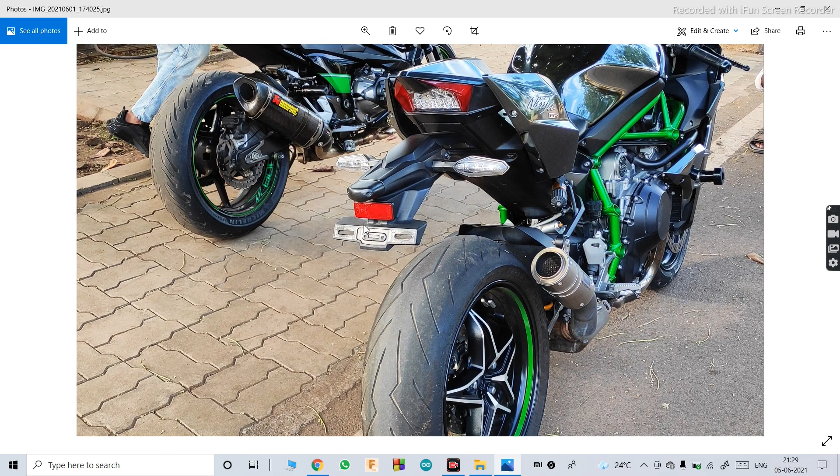That guy just bought this bike like 2 days ago, I guess, and hopefully I got a chance to see it today. Within 2 days, that guy just changed the stock exhaust to a race fit slip-on. He hasn't put the full system till now, but when I spoke to him, he told me that soon enough he's going to do that as well. I'll be waiting for that, anyways.

Insane, just insane. This bike has crossed the level of insanity, guys. We'll get on to his spec very soon. Till then, just get a glimpse of this bike, how it looks.

Those dual 330mm discs look massive in the front. We got a single-sided swing arm in the rear, and the wheel looks so awesome. The front was completely carbon fiber and it was glistening under the sun.

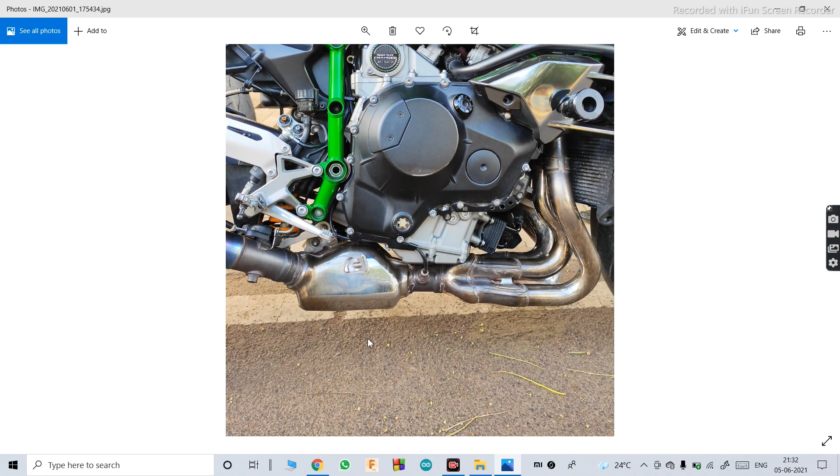Okay, so as you can see, it is written supercharged, and there it is written as 2017, 22 out of 120, limited production bike. As you all know, that green accent looks really cool. Still, there's a catalytic converter which I feel bad about. He even put the sliders, those are essential. Insane, guys, just insane. I shot some of the videos too.

So there nearby even a ZX10R 2021. That idling sounds so good.

So as I told you, this ZX10R is of 2021, and even this guy has changed the exhaust system. He has upgraded it to Akrapovic. It isn't a full system, but you can call it that, because he has changed the bent pipe and the slip-on, and you don't need to change the headers of the ZX10R.

As you know, the stock headers themselves are titanium, and it was the best trio I had ever seen, guys, the best trio of Kawasaki. So we had the Z800, which is the best budget naked, then the ZX10R, which is the liter class best budget bike, and the world's fastest and most powerful bike, the Kawasaki H2 2017.

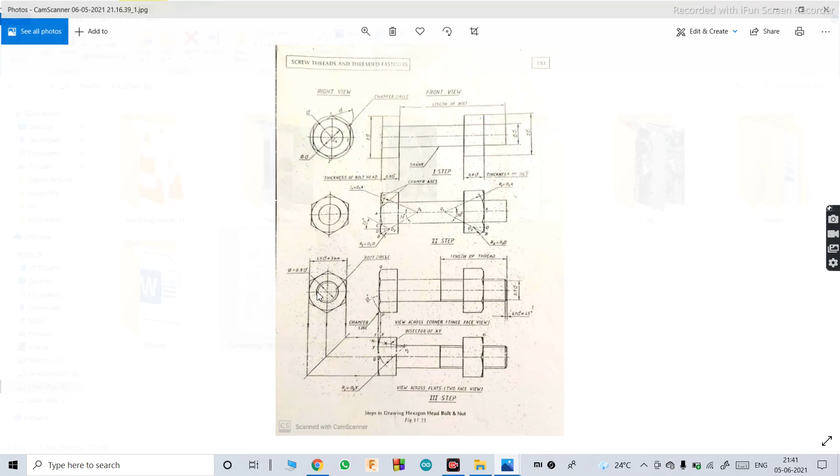We'll move on to the topic we have started this video for. So far what we have done is made a single design which used to be a single part. So in this video what I'm going to do is try to make two parts and assemble them. So we are making a hexagonal bolt and nut.

Okay, so let me show you. Hexagonal nut and bolt. Okay, so this is what it's gonna look like, somewhat like this.

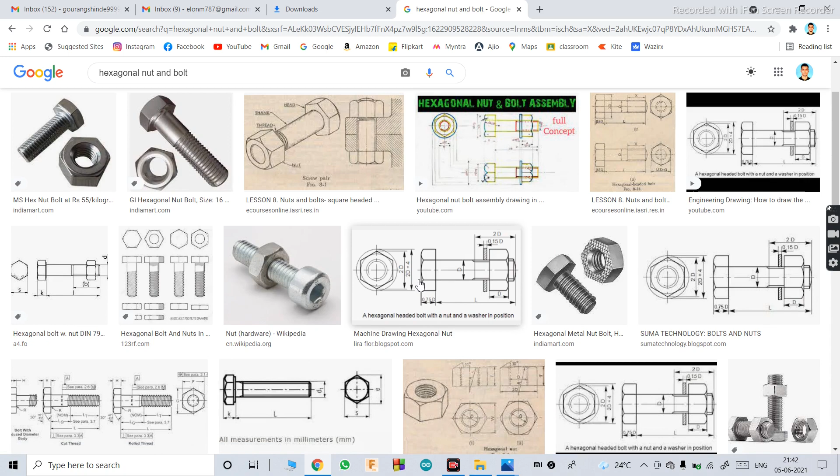So why is it called a hexagonal bolt? Because it has this head that is shaped like a hexagon. You even get square ones. Let me show you. You even get a square nut and bolt.

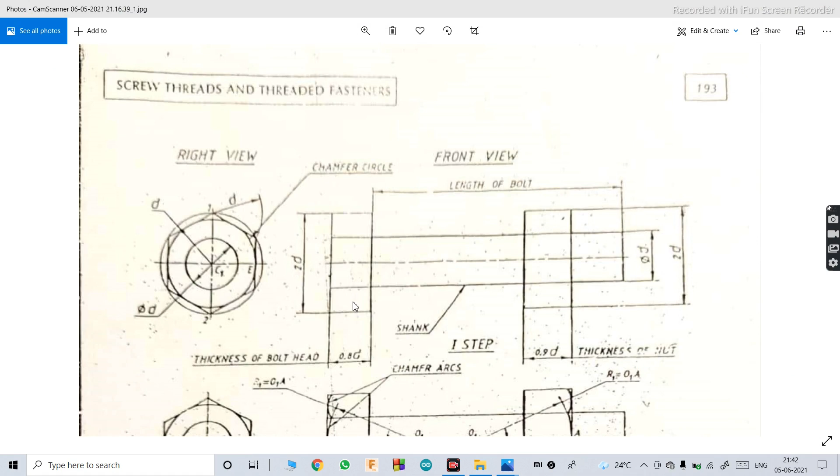So we'll start with the hexagon because that is the one mostly used in the industry, as you might have seen around you. So for that, this is the reference that I'm going to use to 2D sketch. You can download this from the description below. Okay, we'll start with this today.

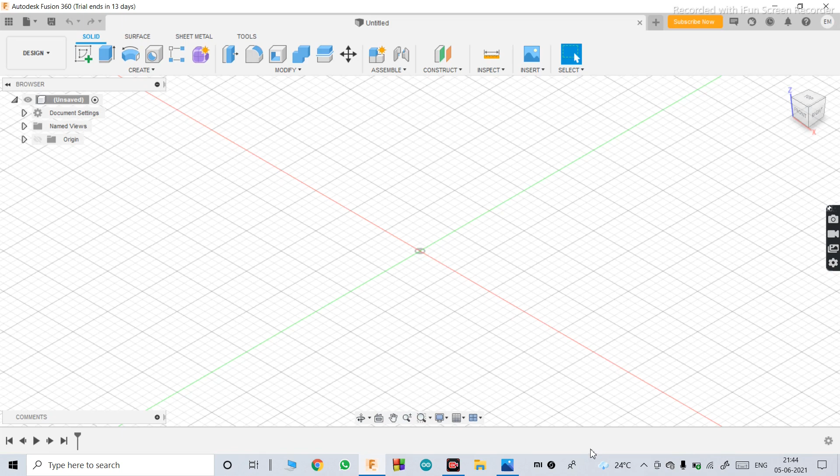Okay, so here the software opens. Let's go back to the sketch.

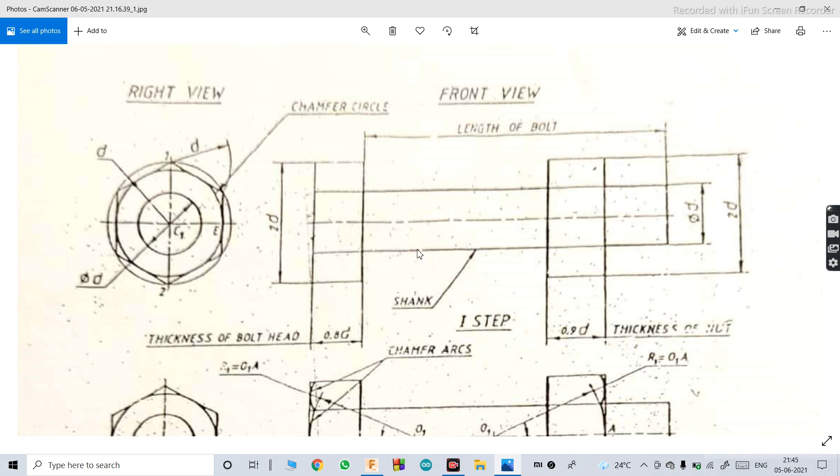Okay, so if you don't know, while making a bolt and nut, there are some industrial specifications you can't exceed. You have to use those standard values. So if you are making a bolt, the bolt head has to always be twice the diameter of the bolt threading part, right? Those are some industrial standards that you have to keep in mind. That's why they haven't mentioned the dimensions here. You can just see that the threaded part is mentioned as d, that is diameter, and if you check the head, it is mentioned as 2d, that is 2 times the diameter used for the threaded part. That is how it is.

So if you want to know the thickness of that head, that is 0.8d, and the thickness of the nut is 0.9d, like that. You have to maintain some standards. Okay, so we'll get started with this. So we know that it is hexagonal, so the first step is we have to make that hexagon shape. That has to be 20.

For this sketch I'm going to use d as 10 mm. You can use as per your requirements, but just to make it easier to understand, I'll be using diameter as 10. So if d is 10, the head diameter, or the distance from this to this, is going to be 2d, that is 2 times 10 is 20. So with that, let's get started.

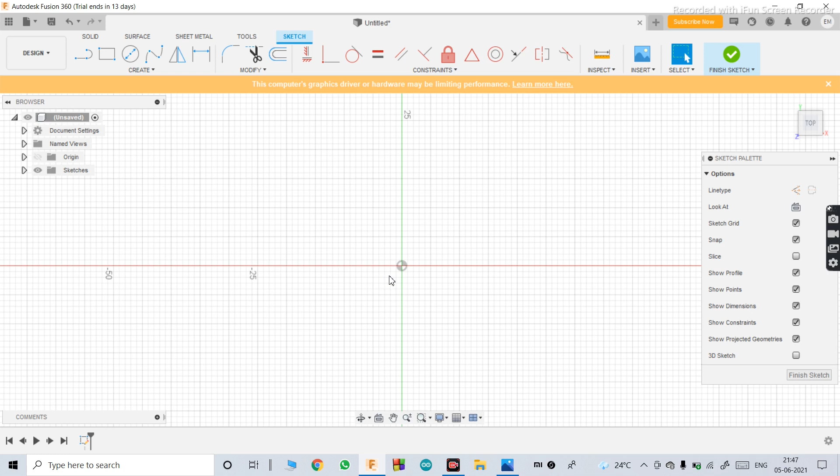Go to sketch, select the top plane, that is where we're gonna start the sketch. There are multiple ways to draw a hexagon, as I've told you previously, so let me show you a basic way. Just make a circle of 20 mm diameter, then use the line command.

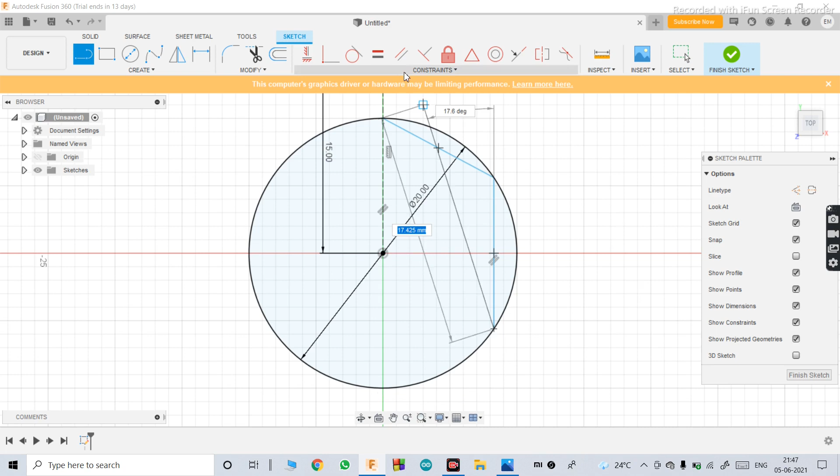Then make it construction, make it 15. Now you'll get the point from where to start. Turn off the construction, and just randomly go on selecting points like this.

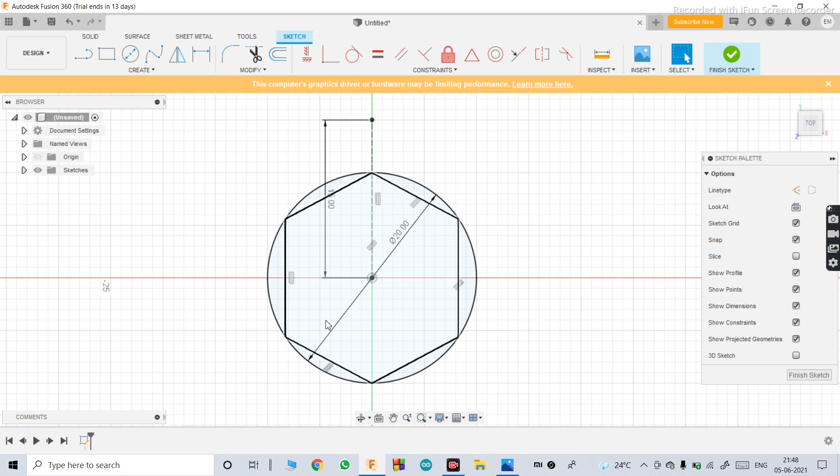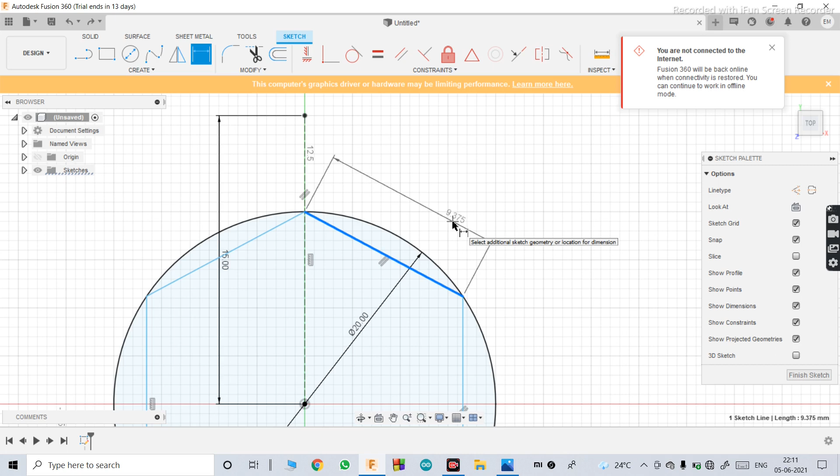Once you do this, go to sketch dimension and select this line. Don't click when it is vertical like this; make sure the blue line is parallel to the line showing up right now. Then click there and make it 10. Hit enter. This implies that these both lines are parallel to each other and the dimensions are also the same for both of those. Let me show you like this.

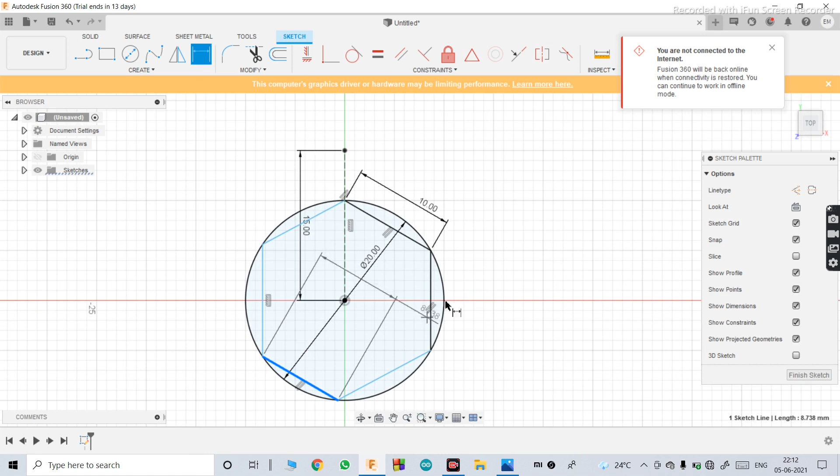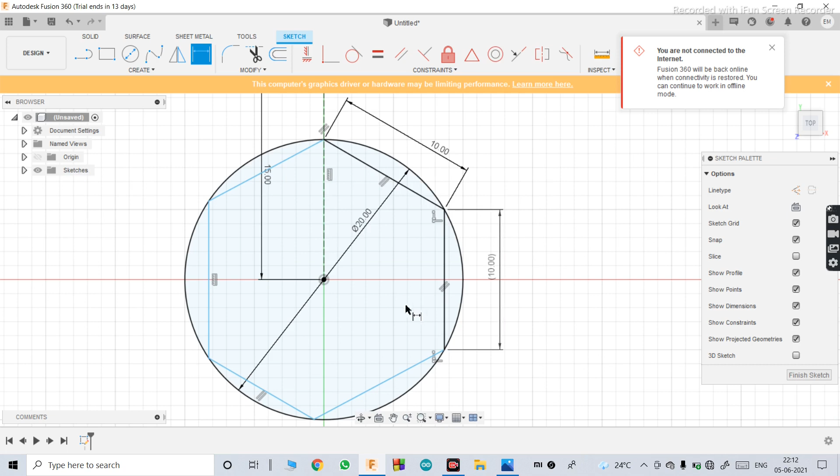So first we'll do the same for the rest of those. This is also 10. As you can see, adding this dimension adds a constraint. Just hit OK. Now make this also 10. As you can see now, we have specified dimensions to these three lines, and it automatically got symmetric on this side also.

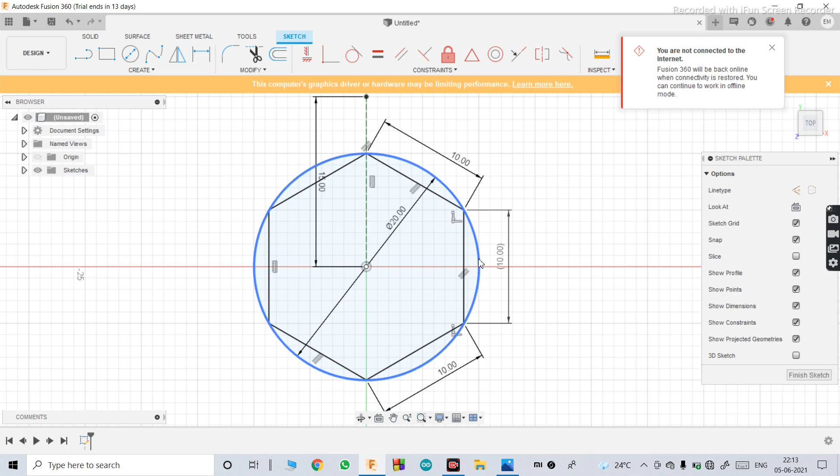Just to verify, you can check that out. Now this is 10, this is also 10, this is also 10, as you can see. So this is a very basic way to make a hexagon, and later on you can just delete this outer circle and we have a perfect hexagon.

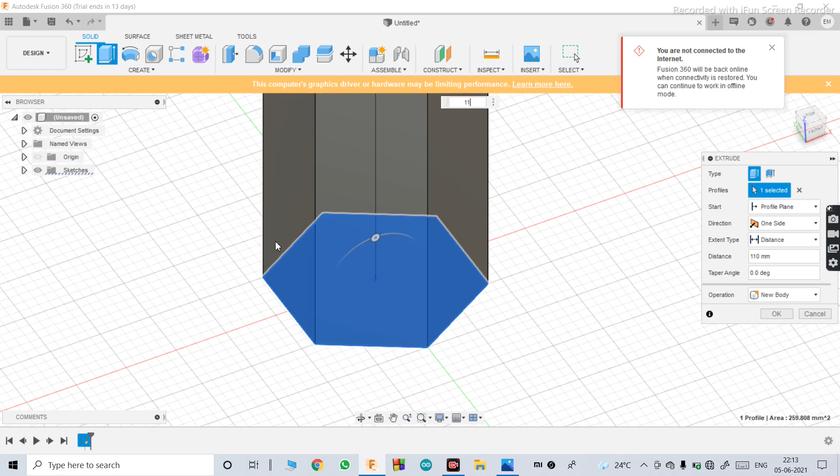You can delete this also and extrude this, like that if you want. I'll tell you another way how to do that. We'll just delete this entire thing.

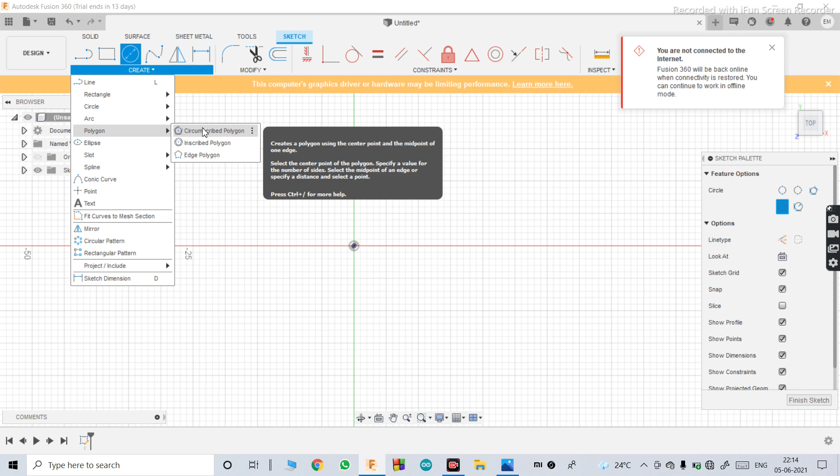Then we'll go here in the create section and use the command called polygon. We'll use circumscribed polygon, meaning it will start from the circle. So don't click anywhere, just click at the center, pull it out, keep it like that only. As you can see, it is asking for two dimensions: one is the radius of the circle, and the other is the number of faces you want.

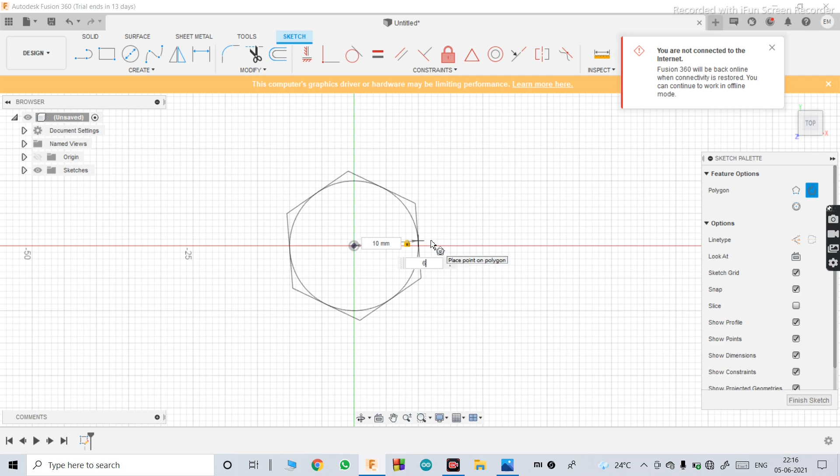The radius of the circle is going to be 10 since the diameter is 20. Once you hit 10, use the tab button, then make the faces 6, and it becomes a hexagon, or make it 5 and it becomes a pentagon, just like that. Make it 6, hit enter, and finish the sketch, and that's how you get a hexagon in the easiest way possible.

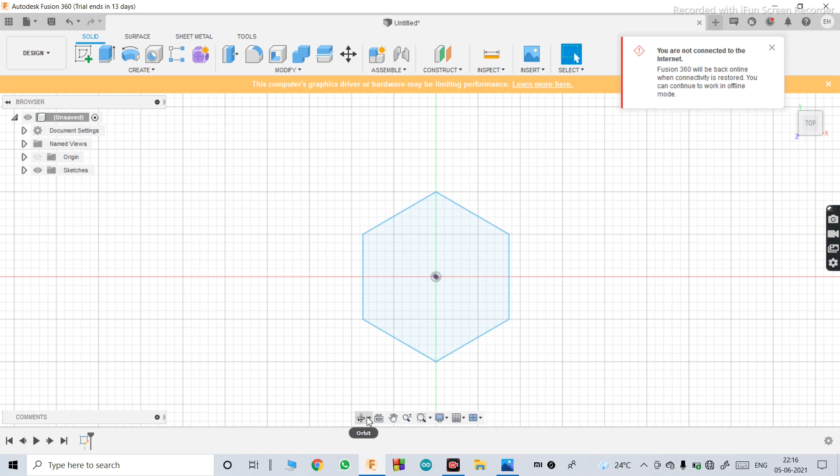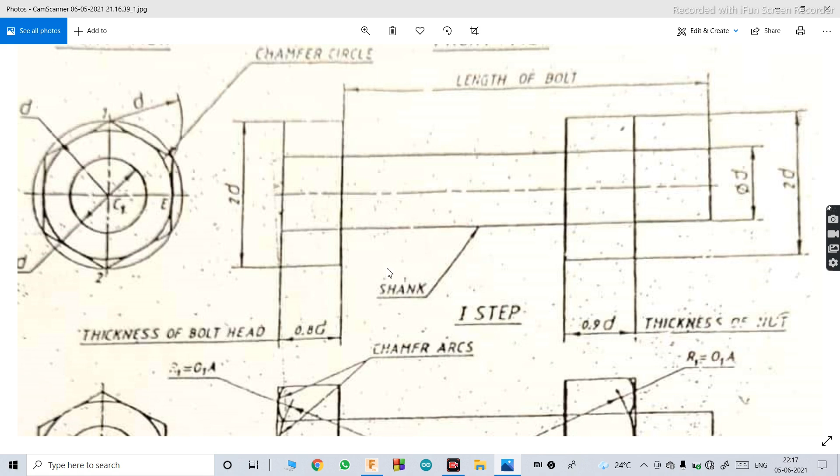Once you are ready with your 2D hexagon, what we have to do is specify the thickness of that head. For that we'll go back to the sketch. As you can see here, it is 0.8D, that is the diameter of the thread as I told you. We've assumed it to be 10 mm, so we'll make it 0.8 multiplied by 10. Select that face, use the tool called extrude, make it 0.8 multiplied by 10. There you are, hit enter.

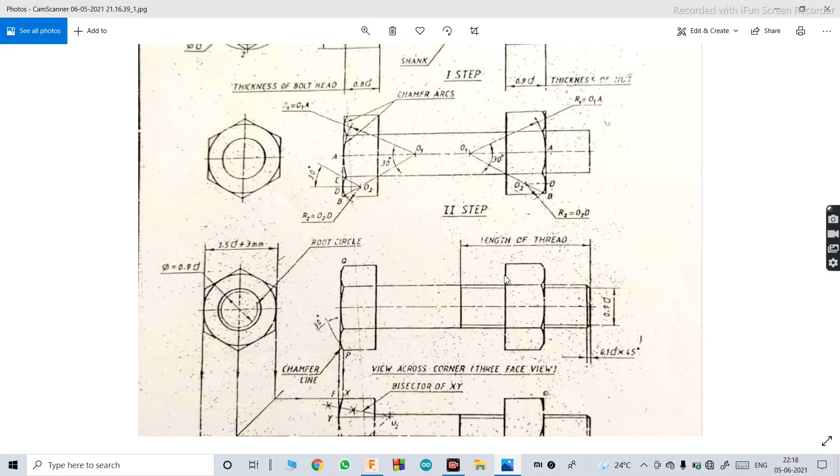So that is our bolt's head right over there. We'll select the upper face because that is where we are going to make the threading part. Then go to sketch again. We know that the threaded shaft is going to be 10 mm in diameter because that is what our D is, right? We assume that D has to be 10 mm. So here I have made a circle of 10 mm.

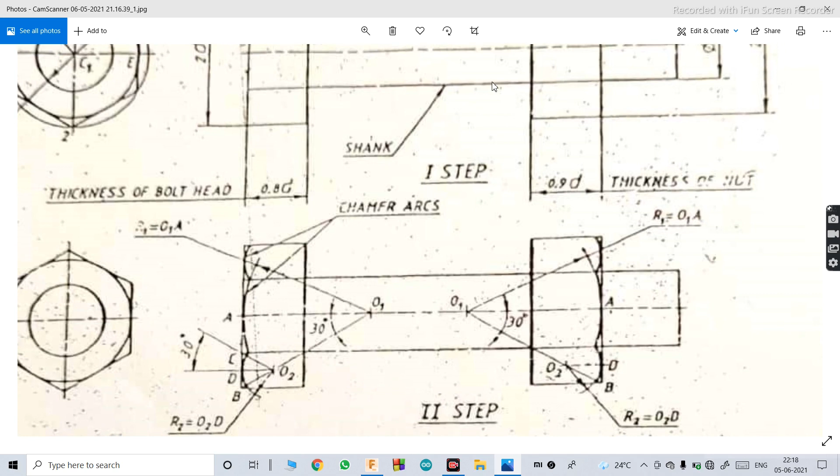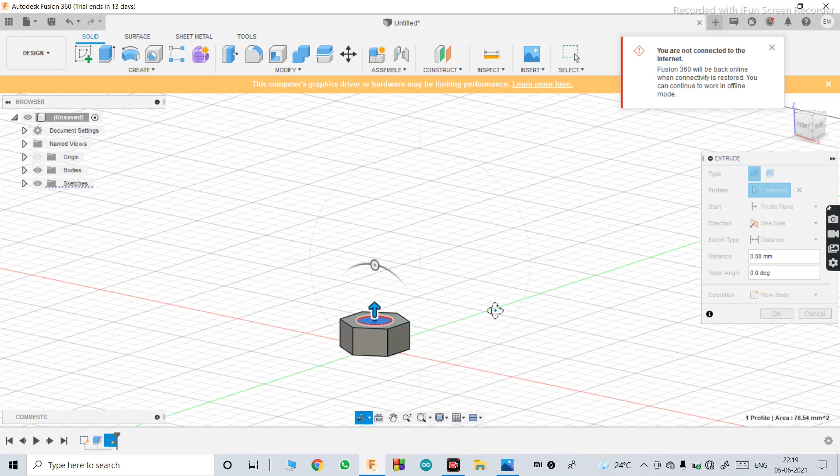We'll just tilt it a little bit. Select this plane, the circle we have made just now — oh wait, before that you have to finish the sketch. Now use the tool called extrude. As you can see, in the sketch they haven't mentioned the length of the bolt, so it depends upon the application where you're gonna use it. You can adjust the length according to you. For this project I'm gonna make it 50. Perfect.

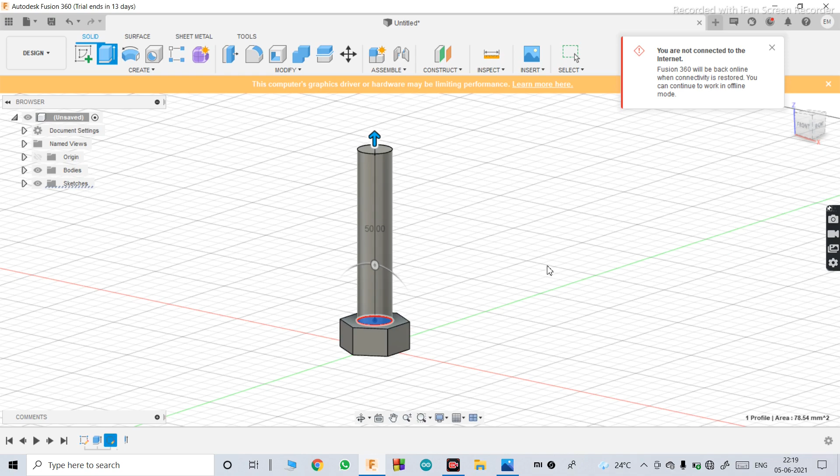Let all these aspects be as it is. Just make sure that the operation has to be joined and hit OK. And our bolt is almost ready.

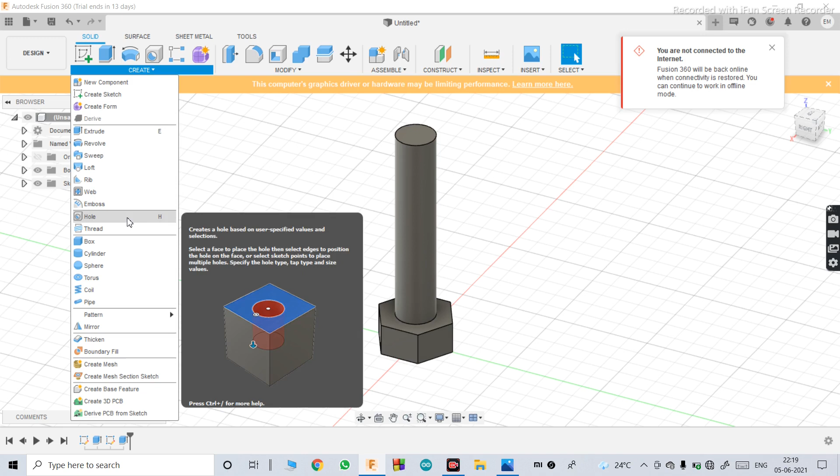What we are missing is the bolt can't be plain like this, right? So we have to make that threaded. Hopefully we got a command called thread over here. We'll select that, and it will ask you to select the faces, so select this face because that is where we want it to be threaded.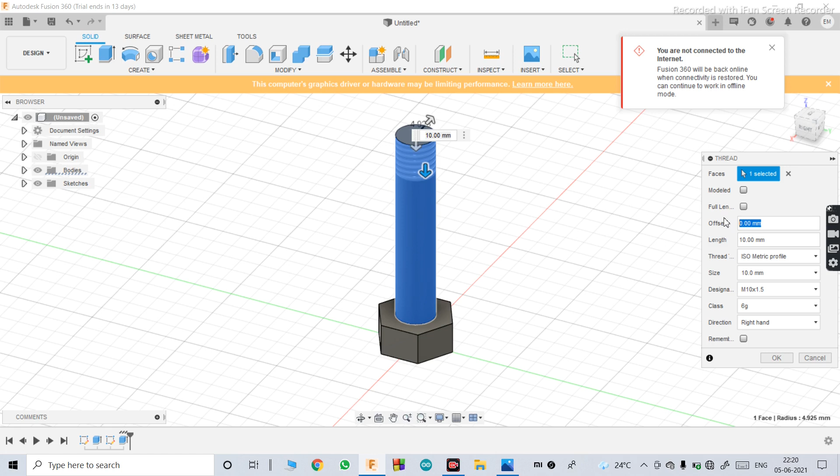Then it will give you a bunch of options, whether you want it to be full length or how much exactly you want it to be. We don't want it full length, so we'll make the offset to 30. Oh, it has become an offset. Let the offset be 0.

Length be 30, perfect. There are multiple thread types such as Acme thread, ISO metric, BSP, ANSI - there are a bunch of them. We'll just keep it as it is. You can even change the size - this will change the diameter of the thread. Make it 5, it becomes too small. Then this is perfect. You can also change the design, class, direction, whether you want it right or left-handed. We'll keep it right and hit OK.

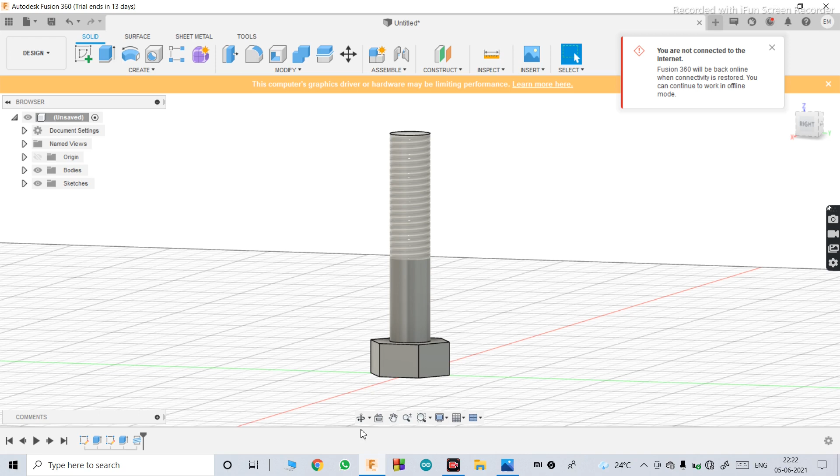So that's how it looks. The distance from this bolt's bottom to the entire length is 50, and we have made only the 30mm part threaded. That's what we wanted. So this is what our bolt looks like.

Now we'll go and make a nut. For that, again go back to the sketch, select the top plane, and repeat the same procedure.

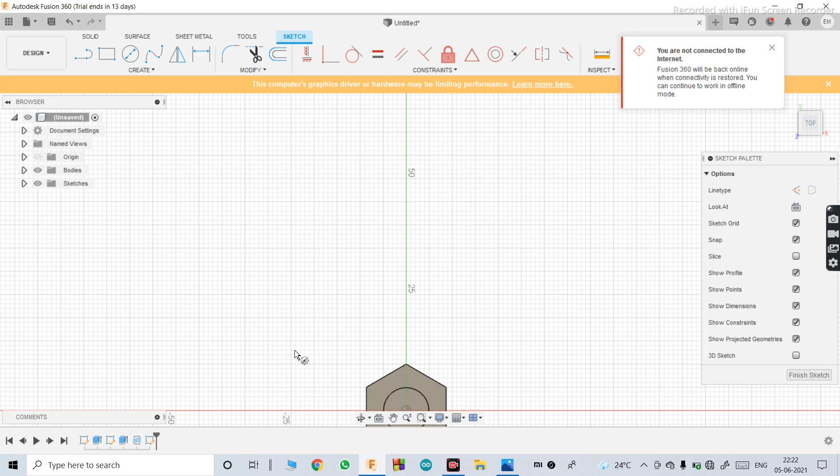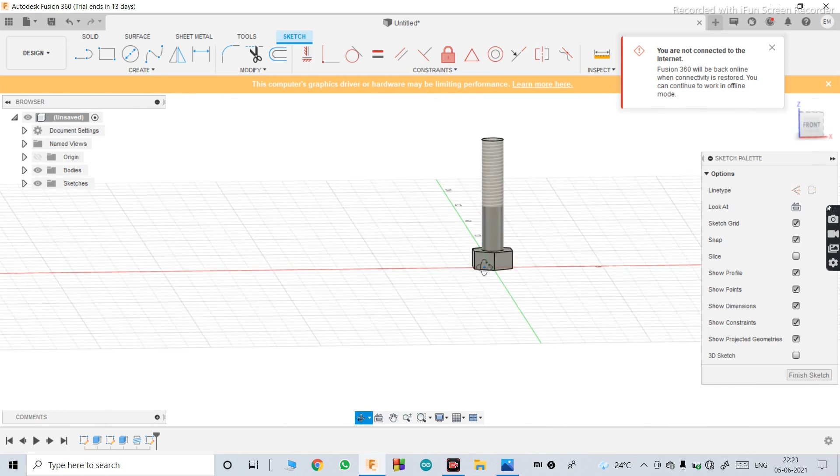Wait. This is a very dumb idea, right? This isn't what you came here for. As you know, the lazy person finds some smart way out.

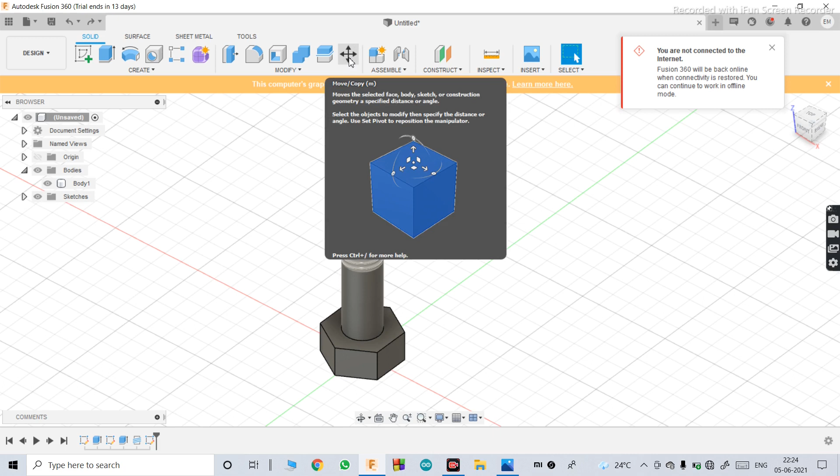So what I'm gonna do is just go here - there's a command called move or copy. Select that. Now select the bolt, and what you have to do is create a copy.

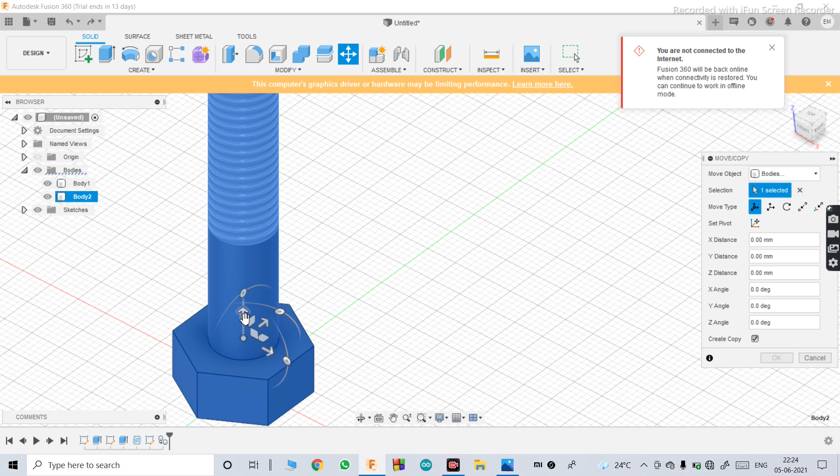Make sure that tick mark is there. Then select any one of these arrows, and drag it outside like that. It will ask for some distance - you can put it randomly, anything like 50. Hit enter. We got a replica of that bolt.

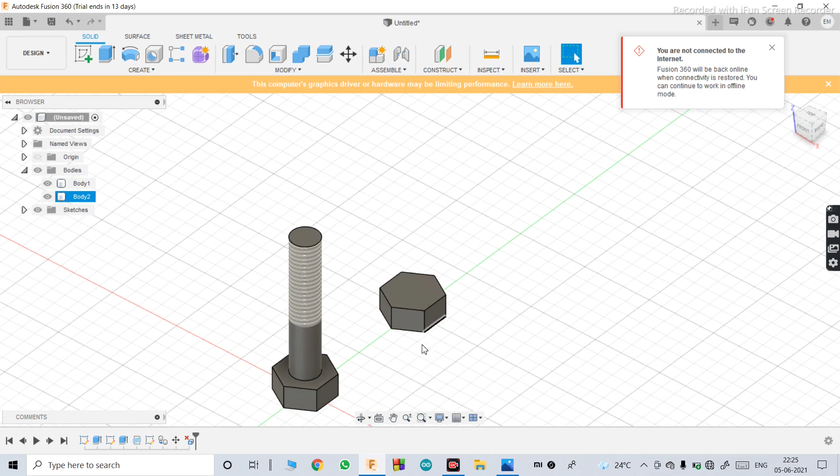So what I'm gonna do is delete this part like that. Then select this plane, use sketch, and select circle again.

If you don't know how to find its center, just go here to sketch dimension, select from this small circle to this small circle. It will give you some distance - as you can see here, 20. So select line, and make sure construction is on.

Create a line. As we know, the total distance is 20, so we'll make it half - make it 10. Enter. Now we'll just delete this dimension.

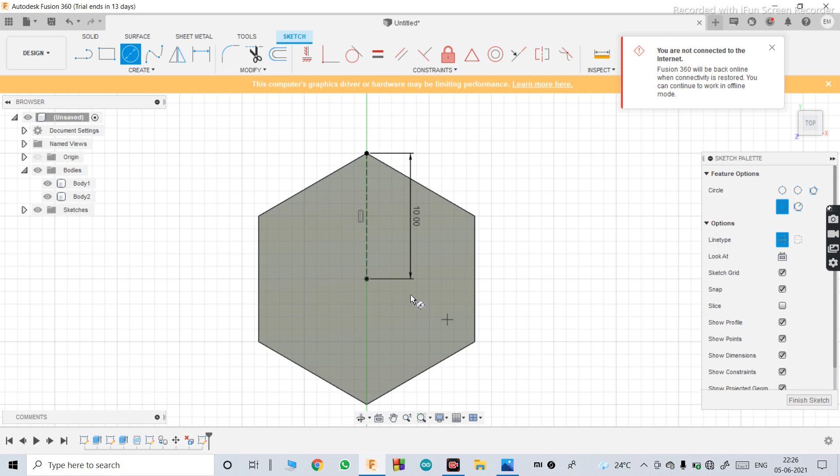We'll use circle, making sure the construction is off. Make a circle of 10mm diameter, and delete this constructed line. Hit finish sketch.

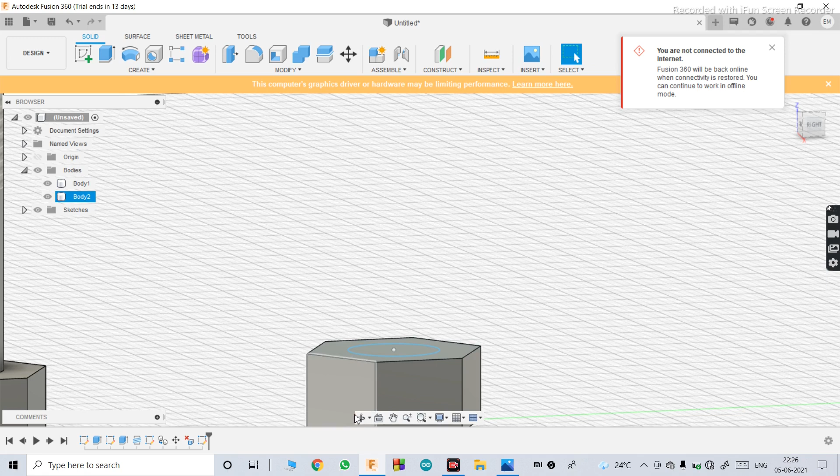Now select the part that we made just now, and use the tool called extrude. Make it -15. It became -15... it became plus. Make it -15, let the operation be cut, and hit OK.

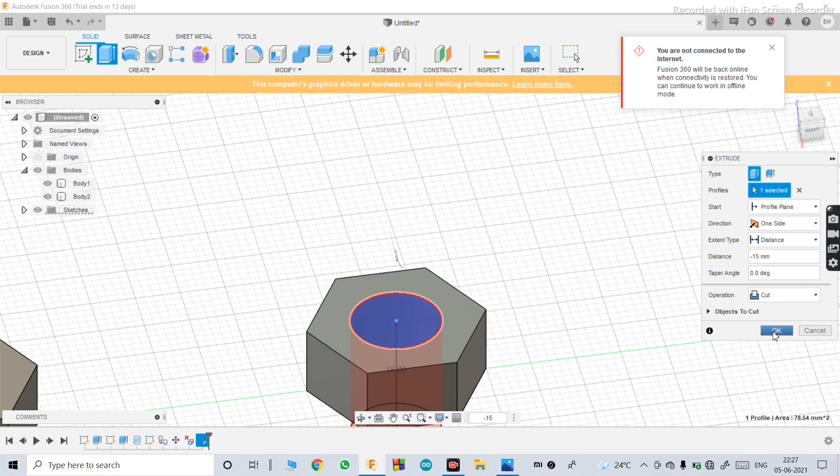And there is a nut, and a nut isn't complete without threading, so we'll give threading to the nut also. These are internal threadings - the length has to be full length, of course, and let all other things be the same. Just hit OK.

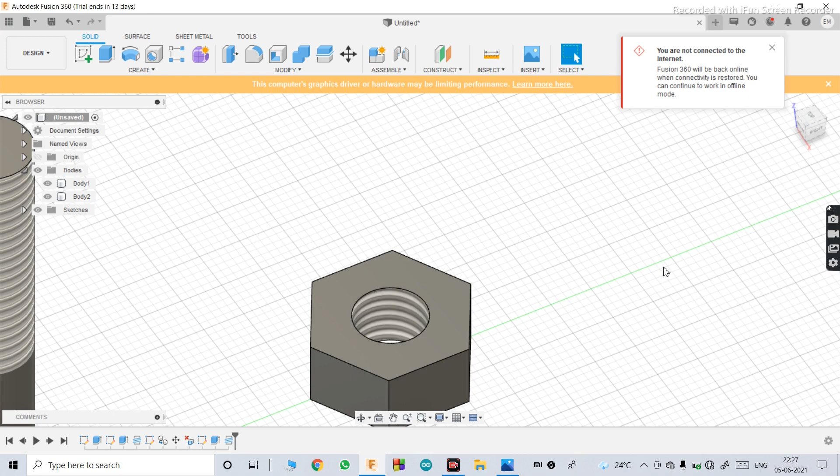Now it is almost ready, right? No, it isn't. Let me find out some mistakes that we did.

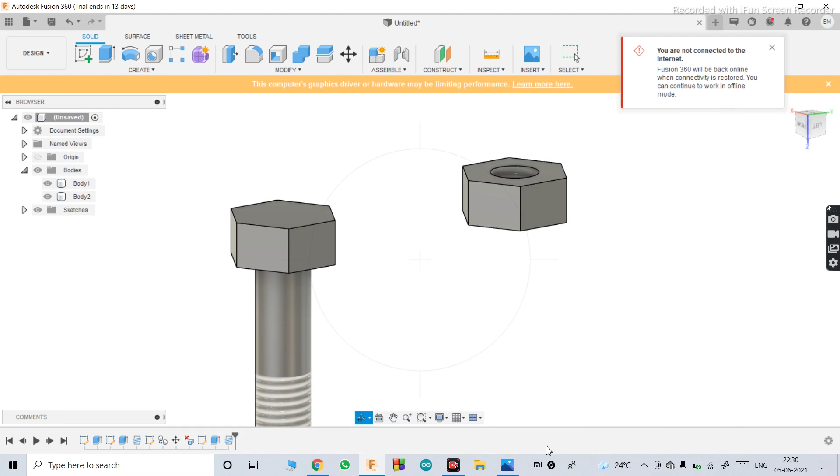Okay, I think I have exhausted my data anyways. Let me go into the sketch. So here it is.

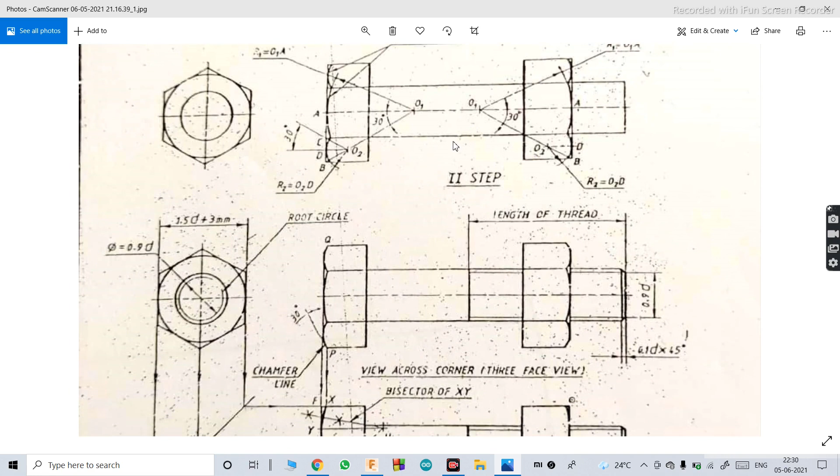I don't know how many of you have observed this, but if you haven't, just go check it out somewhere - there might be some bolts or nuts around you falling somewhere. As you can see, it has some chamfered edges on the top of the head.

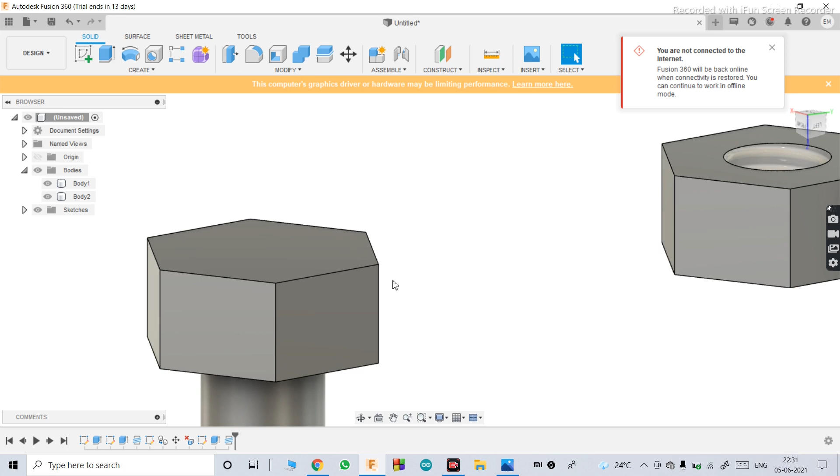These edges are never sharp if you go and observe carefully, to make sure it won't hurt your fingers, or it makes it even simpler when you are using a ring spanner. It slides easily when it has chamfered edges, or else it becomes difficult. So being an engineer, you have to think like one.

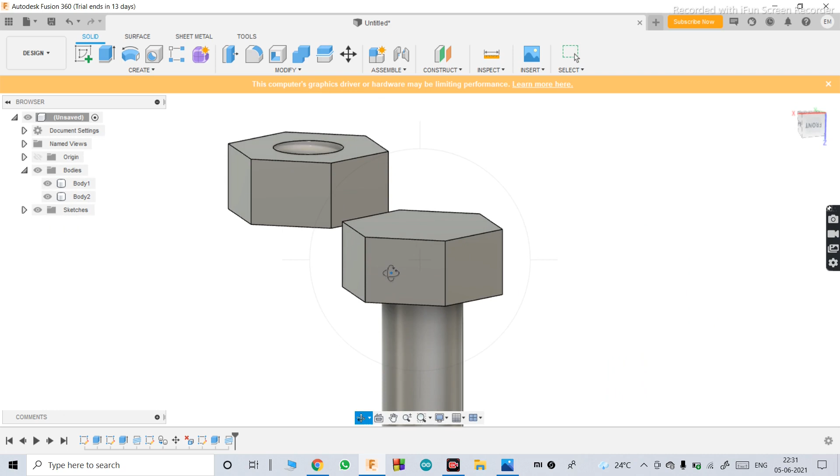You have to think what problems you can face when this is used practically. So for that, we'll chamfer out its edges. Let me just turn on the grid.

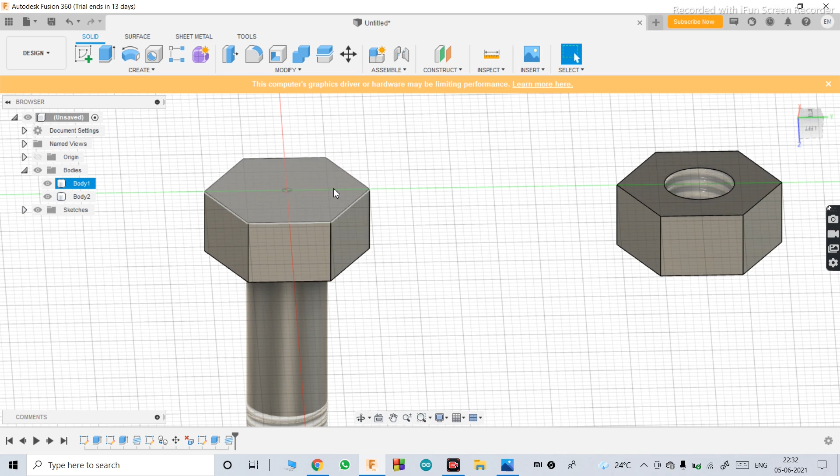Now while selecting, you have to be careful. You have to make sure that when you select the plane, these three faces should be visible. If you see like this, only two faces are visible. Like this, three, it has to be visible. So what we'll do is select this left plane, or you can even select the right plane.

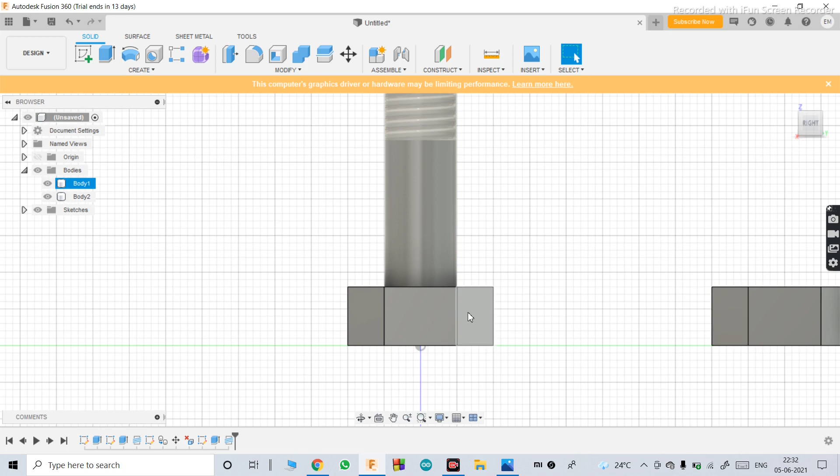Once you select that, you don't have to chamfer the edges towards the threadings. We have to chamfer out the opposite side of the threaded part. So this is what I'm talking about. So for that, what we have to do is...

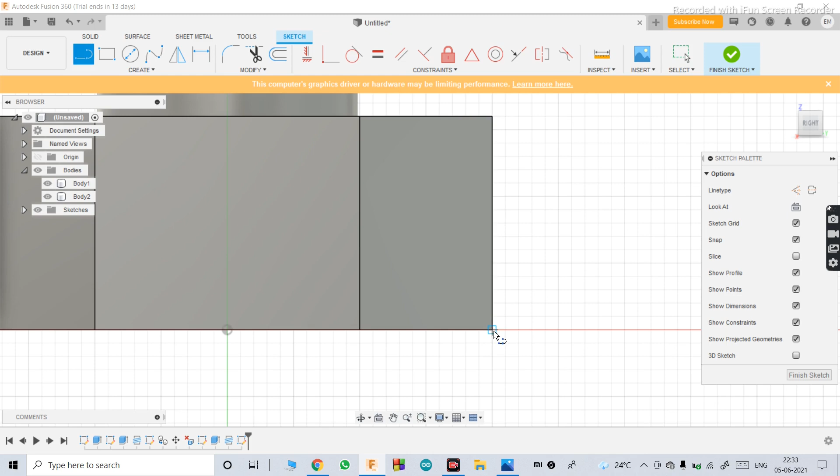We just have to select this right, select the sketch, turn off the bodies, select this plane, again turn on the bodies. Now use line, make it construction, select this center point and make that as 10, enter, turn off the construction, again use line.

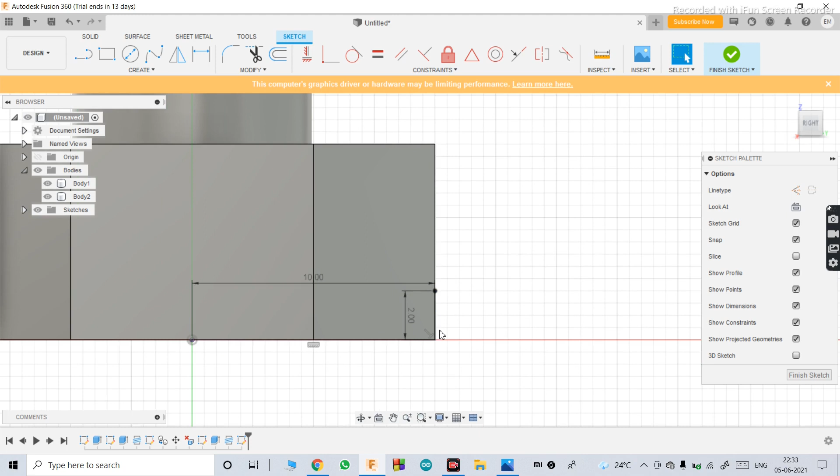Make it around 2 mm tall. That would be too big, make it 1.5, perfect I guess. Do the same, let the width be 1.5, then just connect both those lines and then finish the sketch.

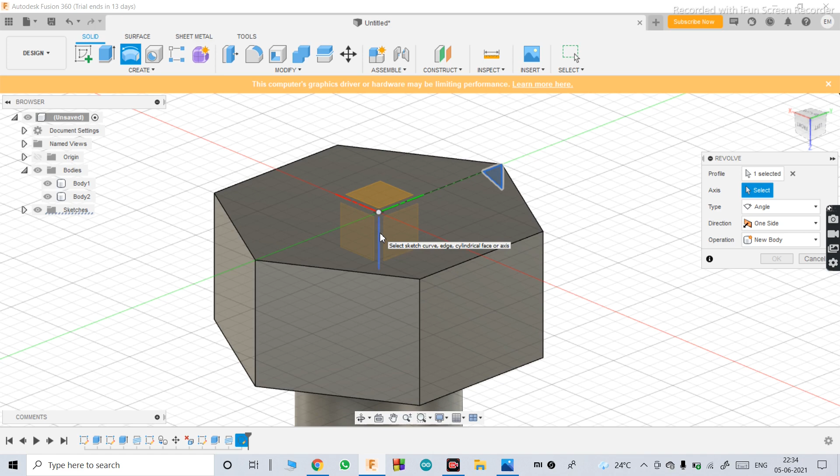Now hide the bodies, select the plane we made just now, again unhide the bodies, and use the tool called revolve, and select this blue line or the central axis of the bolt. So this is what it looks like.

As soon as you select that blue line, make sure your operation has to be cut. Don't mess with any other thing, just hit OK. Yeah, right there, that's what I'm talking about. Now it's nice and doesn't have sharp edges, so it won't hurt anyone's fingers.

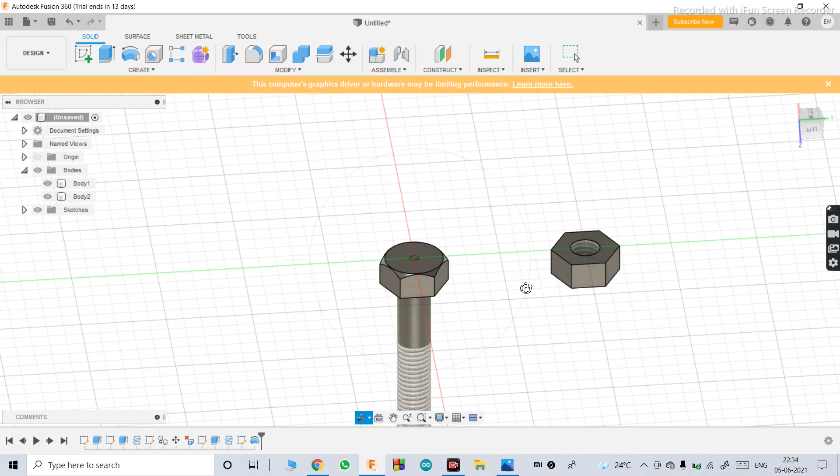We'll do the same for this nut also. Again, we'll select the left plane, we'll do the sketch, hide the bodies like this, unhide the bodies.

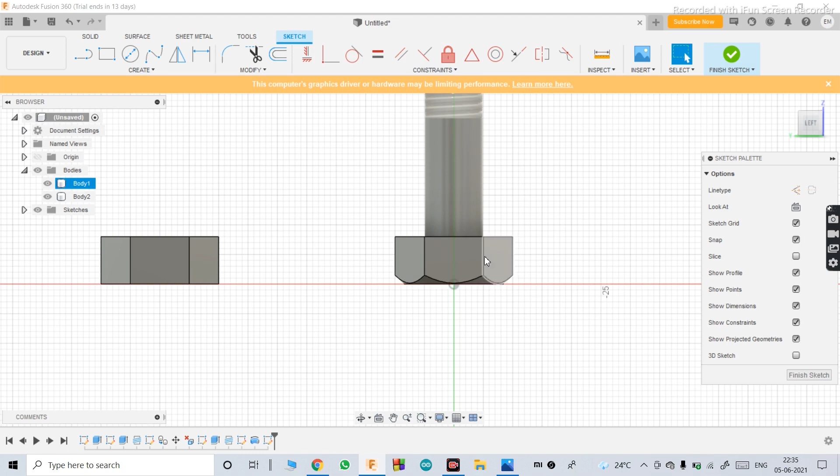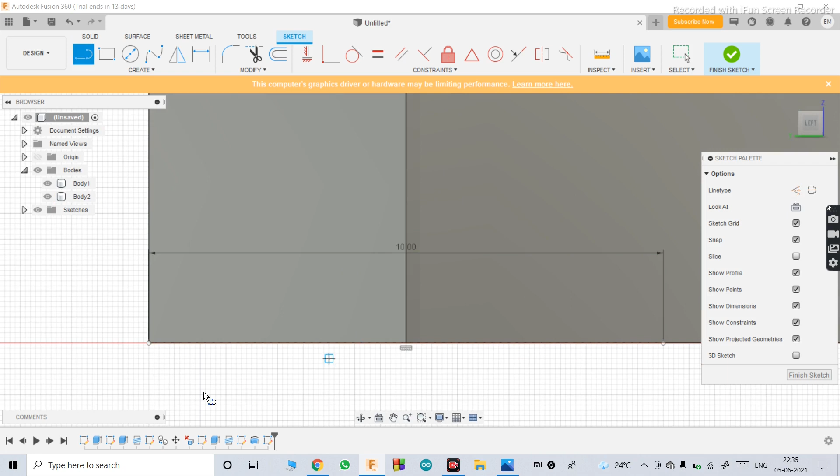Select line, make it construction, make it 10, again use line, this time turn off the construction, get 1.5, hit enter, repeat the same horizontally, then just connect both the lines, make sure it becomes a perfect triangle, finish the sketch, hide the bodies.

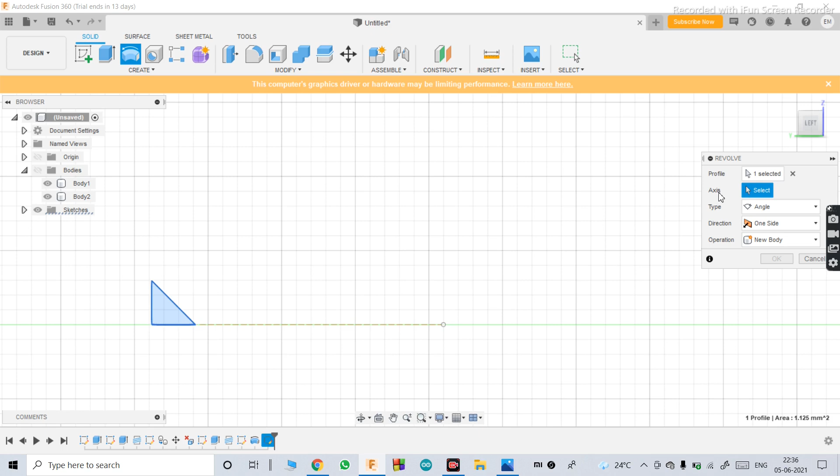Select this part, revolve it around. Okay, so it will ask for the axis, but we don't have that for now because we have used that over here, so you don't have to worry about that. What you just have to do is cancel this.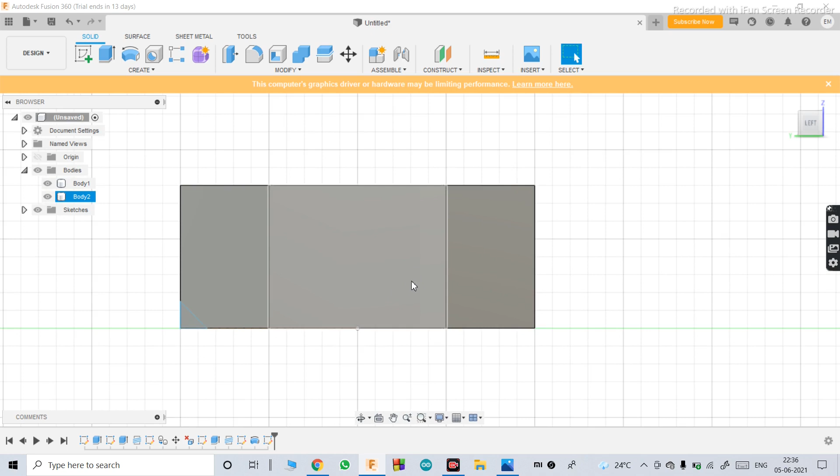Then unhide the bodies again. This time select line - come on. Before that you have to go into sketch, select this plane. Now you'll get the line command, make it construction, make these as 8 mm.

Again select, or let the construction be on. This time what you have to do is hide the bodies and make the vertical construction line as 4 mm.

Again select the construction line, make that as 10, hit enter. Now select this triangle that we made just now.

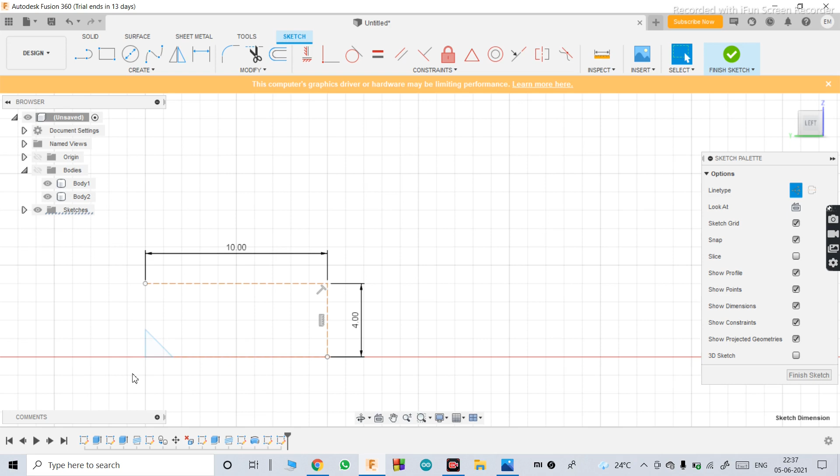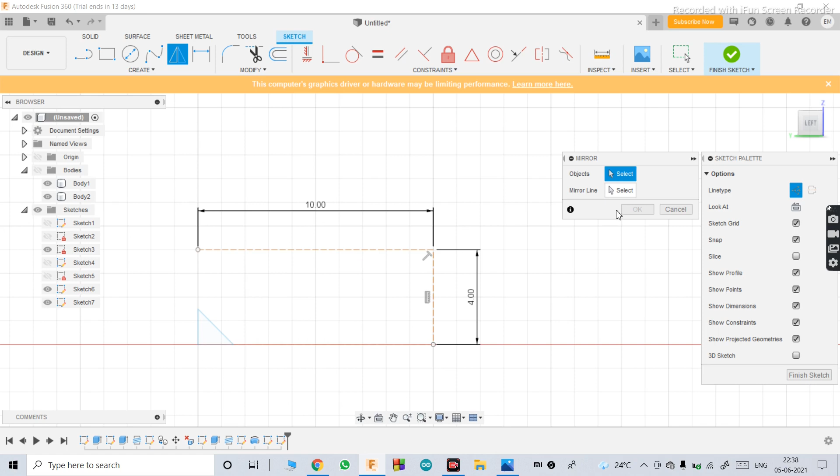Select that triangle, use the command called mirror, select the mirror line as this horizontal construction line, and for objects select sketch 6. If you are not able to select, don't worry, just cancel it, finish the sketch, turn on the bodies.

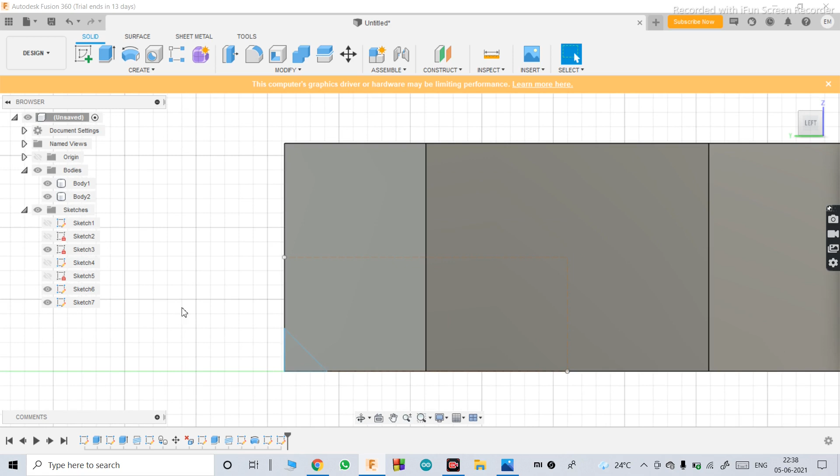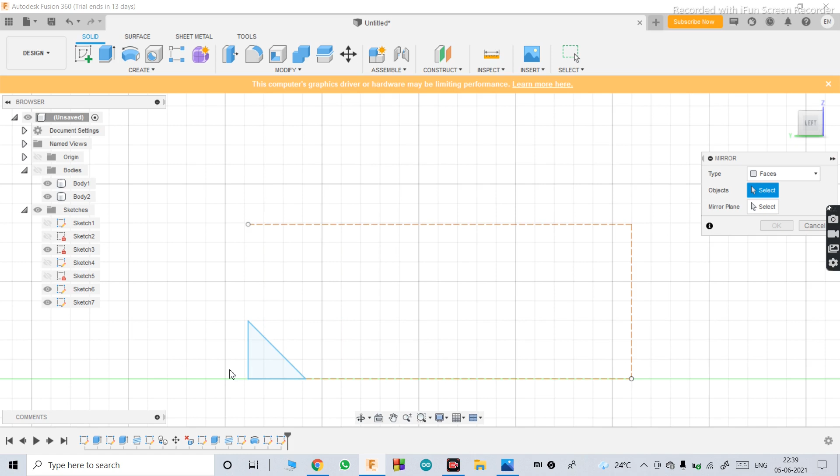Now select that triangle we made just now. Go into mirror. Still, if you are not able to do it, don't worry. So first what we'll do is first revolve it around.

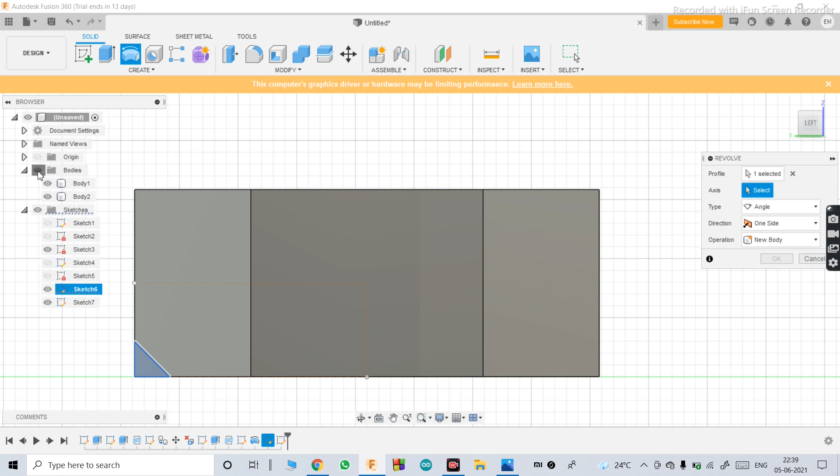So the profile has been selected here, just select the axis. For that, hide body, select this vertical construction line, turn on the bodies again, and you'll see that cut taking place right there.

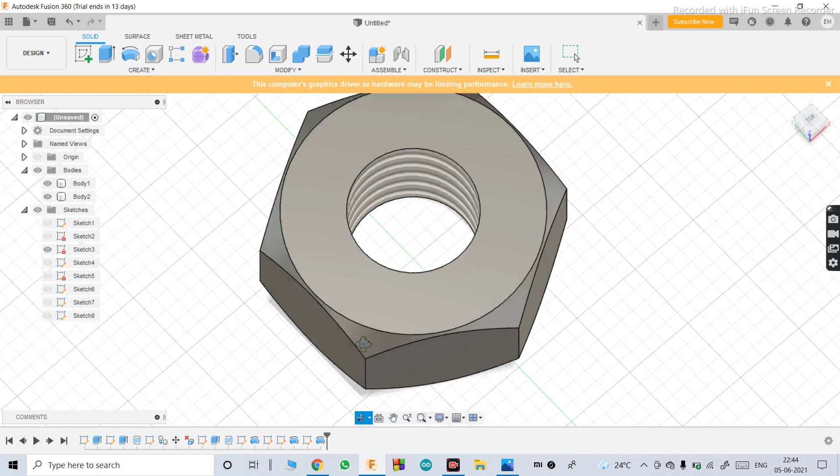Whoa, never seen a perfect nut like this, right? So there's a bolt and a nut. Perfect.

Now nothing is left here, it is perfectly ready. If you are thinking like why I haven't chamfered these edges out, you can go and check - practically it is like that only. The other end of the head is not chamfered, it is left like that only.

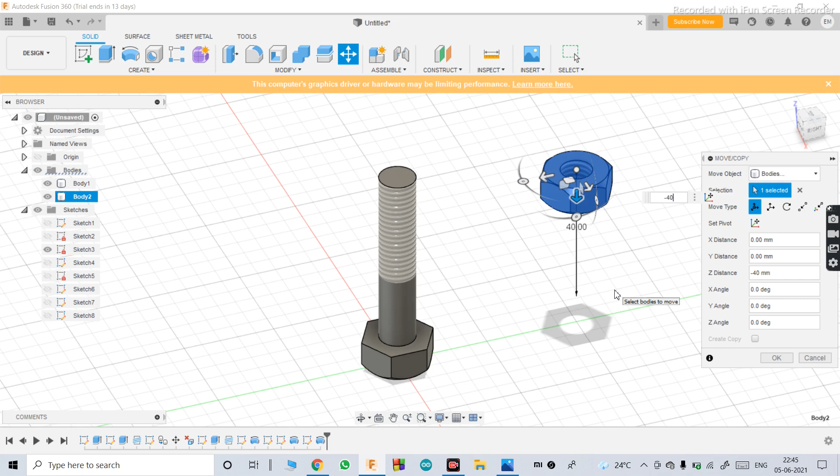Okay, we'll start assembling it now. So for that, go here into move, select this, okay, so make it minus 40. Hit enter.

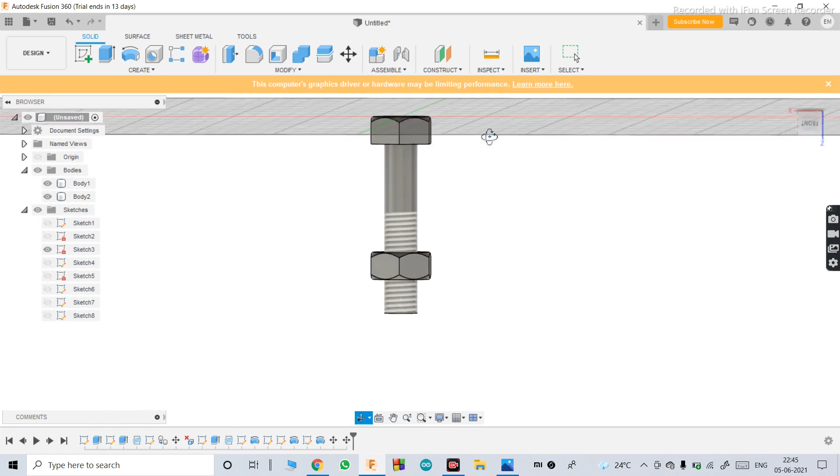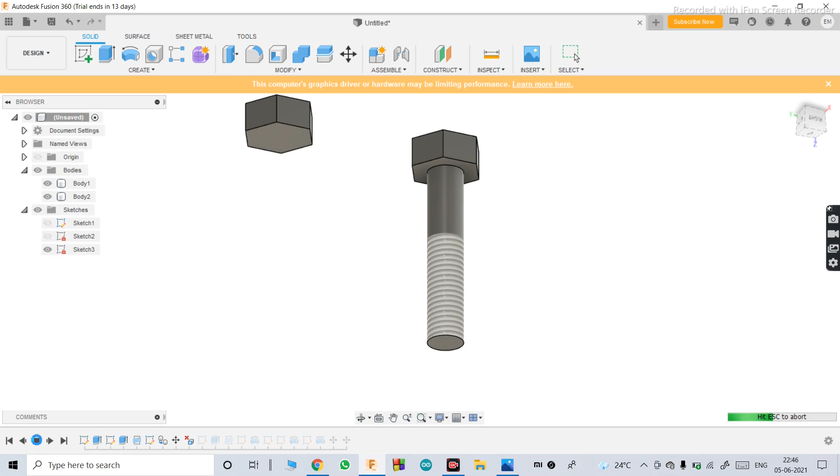Our nut and bolt assembly is ready. So if you want to check what we have made so far, just go here, you'll see a play button. Just play that, you'll see part by part how we did everything. Nice little animation right over there, and it is ready.

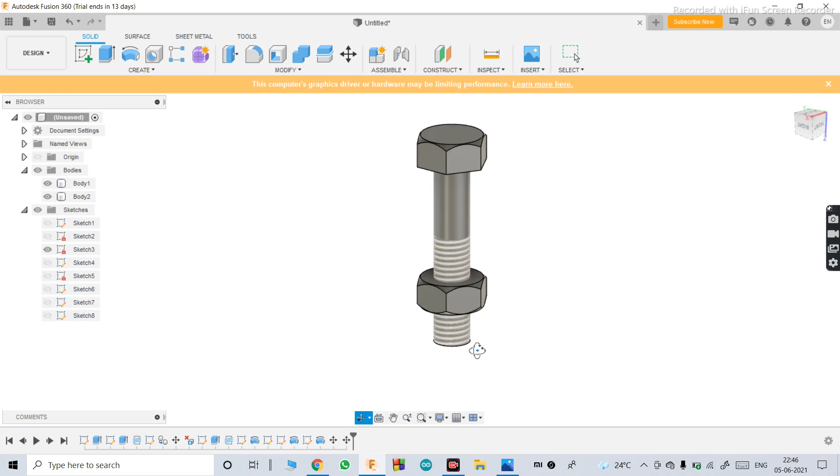I hope you liked this and you learned something out of it. Keep practicing this - you can make a square-headed bolt on your own. You should try that out also. You can try with some other types of threadings or some different dimensions. You can play it around, just keep practicing.